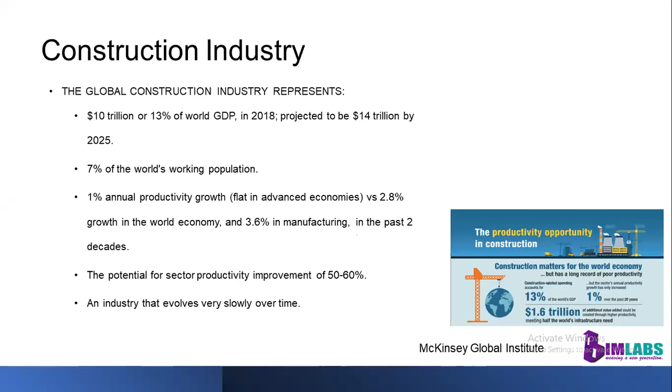So as a whole, when comparing all the construction works, we can classify the construction industry into three categories: the first is building construction, the second is infrastructure engineering, and the third is industrial construction.

Under building construction, the most common kind, and most familiar to you, is residential construction. The second is non-residential construction. Residential construction involves all the houses or buildings meant for residential purposes. Non-residential buildings will not have a residential purpose, and they will be procured by private organizations, or sometimes by government organizations.

Next is infrastructure, meaning heavy civil engineering works, for example large public works, dams, bridges, highways, railways, water systems, wastewater systems, and utility distribution. When it comes to industrial construction, mainly offshore construction, examples include power generation plants, mills, manufacturing plants, mining and quarrying, etc.

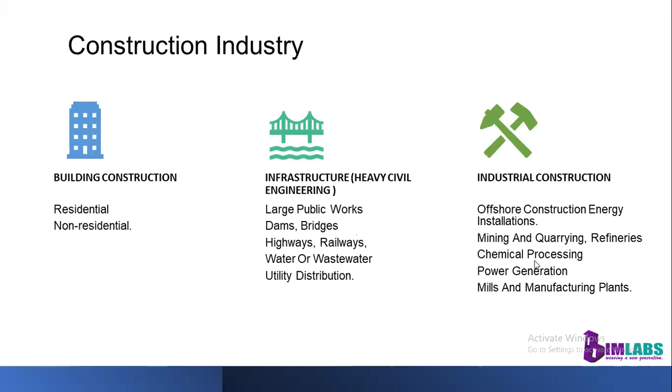Let's look deep into residential construction. When I'm talking about this, you can imagine a house being built nearby you. Consider that you are going to construct a house for yourself. For your construction there will be different processes involved, and it will be undertaken by the landowner. If you are going to construct a house, you will be the landowner, the individual undertaking that project.

In some cases the individual can create a plan for their building depending on the size of the house. If it's a small building, you can plan it yourself, or we can consult different house builders near you, any best property developers, or general contractors, etc. We can also go for providers of public or social housing.

When you think about residential construction, do you think that in the US, residential buildings are constructed using timber or wood? And in India, we construct residential buildings using brick or concrete block, isn't it? So why is this variation in material happening between these two countries? Have you thought about that?

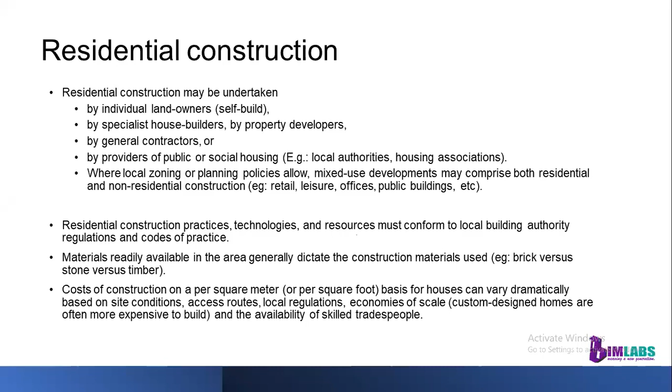Next is non-residential construction. Depending upon the type of building, non-residential construction can be procured by a wide range of private or public organizations, including local authorities, educational or religious bodies, transport undertakings, retailers, property developers, etc. Such construction is complex compared to normal residential building, and this requires a general contractor, under whom there will be subcontractors managed by the general contractor.

I would like to share a video with you which will describe residential construction and non-residential construction.

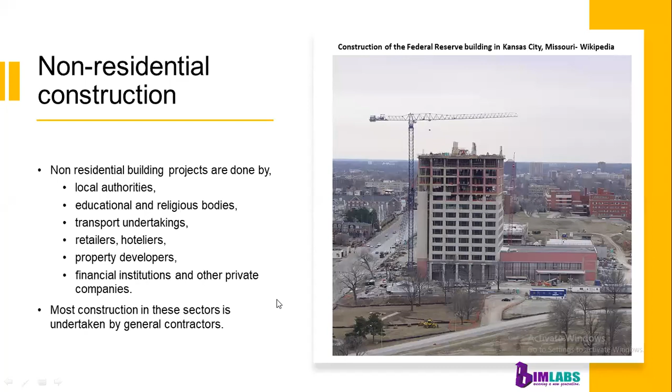Next is infrastructure construction, meaning the construction of roads, bridges, canals, dams, tunnels, airports, and so on. This kind of infrastructure construction takes a lot of time, sometimes years to complete, and it differs from residential and non-residential construction. Compared to those, it becomes more complex.

When finding contractors for this job, we should find expertise in this kind of work. For example, if you are going to construct a dam, you should call a contractor who is expert in the field of constructing dams, not in the field of constructing tunnels. This is very important, and safety measures should also be taken while constructing infrastructure works.

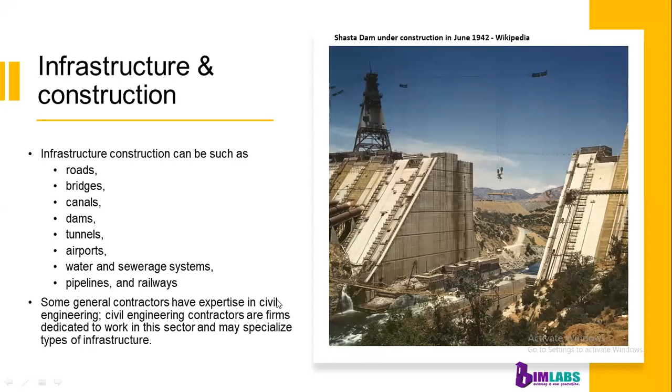Next is industrial construction. As the name suggests, industrial construction is the kind of construction done for industrial purposes, mostly offshore construction like wind power construction, plant construction, mining, quarrying, refineries, and so on.

Do you think that the construction process, from the starting planning to the end of the project, is similar for mining compared to the construction process of a warehouse? Do you think so?

Okay, if you think so, I'm asking a question for you. Hello? Do you think that the process of construction in the refinery, like in the... excuse me, Shibin, are you asking anything?

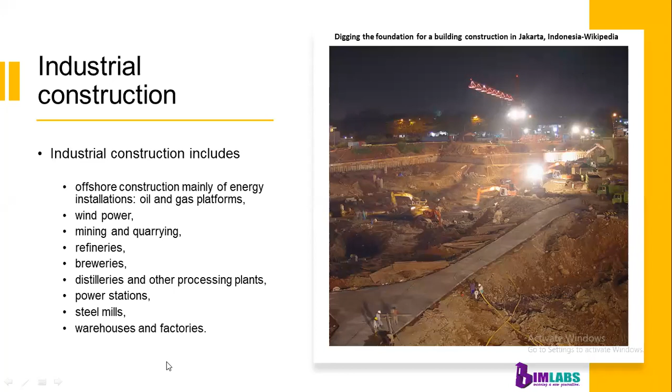Then what are the construction processes there? There are different processes for completing the construction, like planning, then financing, design and documentation, construction, and so on.

In the planning stage, for explaining these steps, I would like to tell you about a very familiar and popular project. You may have heard about the Lulu Mall. Lulu Mall is now constructing in Trivandrum, it is in the construction stage. So I'm going to take it as an example.

In the planning stage, the Lulu group thought about what they are going to build. They decided they will create a shopping mall. Then, where are they going to build it? In the first time, they actually tried to build it in another place. Now they are constructing it in a place called Akkulam in Trivandrum.

In the initial stage, the place was not there, it was actually near Pattom, another place in Trivandrum. But then they rethought for another place, and got more area in Akkulam. So they changed the idea for building it in Akkulam. These things are included in the planning stage.

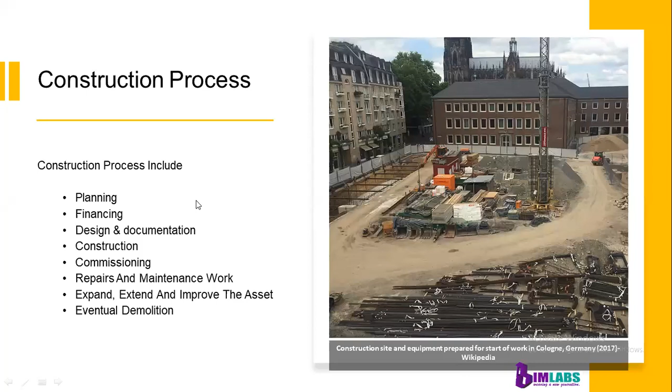Next is eventual demolition. Like in Kerala, in Ernakulam, you may have heard about the Maradu flat demolition. So if needed, the demolition part also comes under the construction process.

If it's a small project, the owner itself can act as the designer, paymaster, and also the labor for the entire project.

If the project becomes complex, and needs any kind of custom design house or custom design projects, then it will need multidisciplinary expertise - meaning different disciplines like engineering, architecture, mechanical, electrical, etc. For a complex building, we need the role of all these disciplines and the manpower from each.

For example, designer, contractor, construction manager - there are other professionals too, like quality manager, etc. And they all have different roles of their own.

For delivering such projects, while starting in the initial period, we can decide which project delivery method we are choosing. There are a lot of project delivery methods. In India, we commonly see two project delivery methods used - design-bid-build method and design-build method.

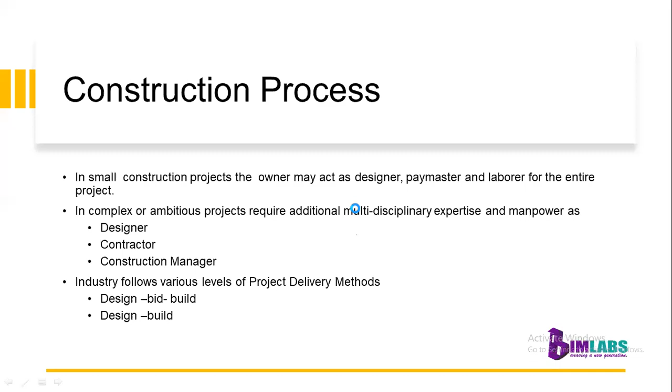In a construction project, there are unskilled persons, semi-skilled workers or laborers, skilled trade persons, and professionals, including technical professionals and managerial professionals. Skilled trade persons include carpenters, electricians, plumbers, and so on. Professionals include architects, civil engineers, building service engineers, project managers, etc.

Now, the AECO industry. Have you heard about this AECO industry? What does AECO stand for? If you have heard about it, can you give me the answer for what AECO stands for? Please put that in the chat, I will give you one minute. Can you guess the full form of AECO industry?

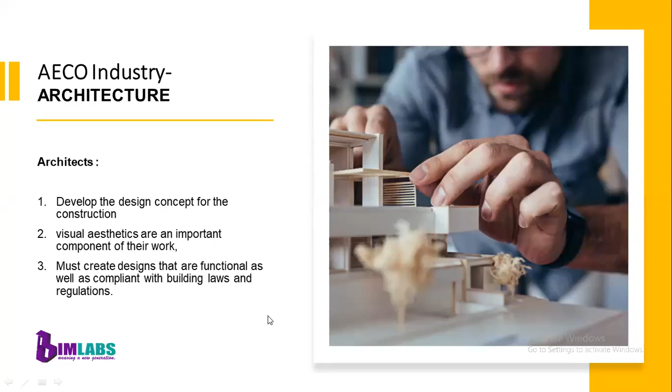Obviously no. So we should also look into the functionality of the building. If you want to meet the functionality of the building, we should follow some rules and regulations. We should meet all these rules and regulations for making our building functionally capable. So that thing is also in the hands of architects - they have a role in taking care of these kinds of rules and regulations. And up to the end of the project, they have a role of inspecting whether this is happening in all the construction processes, in other stages also, and analyzing, etc.

So in the AECO industry, the first letter is meant for architecture. The architect has a very complex role in the construction process from its inception to the end, so their responsibilities are like this.

They have to understand all the requirements of their client. They have to get the idea from the client, and with the idea they can create the drawing for the client. Also they can create a model for pleasing the client. Then they can also work in quantifying and qualifying the project in terms of budget, site characteristics, and regulations. And then they can develop a sequence of operations. After that, they can keep records for daily progress. Then they can manage the bidding process when a contract is bid on a job.

Then they can clarify the details for the engineer or construction team, since they are creating the conceptual drawing - they have the idea of the plan. So when it comes to the engineering and construction team's process, they may have different doubts in the plan. If there is any problem in the drawing plan, or if there is any risk that can happen by following this plan, these kinds of problems they will tell to the architect. So at this time also, the architects have roles in clearing their doubts, and they also have to certify whether the project is completing in the prescribed manner from the starting to the end of the project. So these are the roles and responsibilities of the architects.

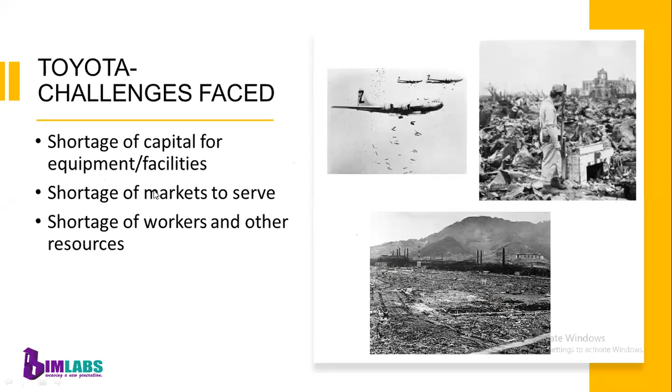The problem they faced was the scenario in Japan after World War Two. There were not many resources left in the country, and no one to provide investment for starting an automobile manufacturing company. Even the markets were very limited, as people couldn't afford to pay a large amount for cars. These were the criteria they had in mind while starting Toyota Motor Company.

It was an idea of Taiichi Ohno which revolutionized the management principles. He found the principle of the Toyota Production System, which is the base for lean manufacturing, or simply the lean principle. Here, what they did was remove all processes which don't add value to the final product, and tried to minimize waste as much as possible.

To do that, they didn't produce several cars a year; they only produced as per requirement. It's also called just-in-time production. Their major concern was to reduce waste and avoid non-value-added services.

This is actually the concept of lean construction also. Here too, we focus on reducing waste. You might be familiar that after completion of construction, there can be several wastage of materials. Even some persons might be working on a particular thing that ultimately doesn't make sense, so that working hour of that person is also considered waste.

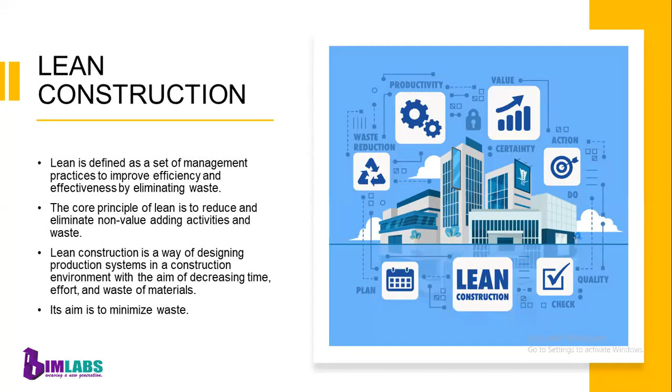Many of you might be new to this concept, but you have to be aware of it because it's currently an emerging technology, and for current graduates it's essential that you know these concepts.

If we compare lean construction with traditional systems, many of the disadvantages could be avoided when we use lean construction. Some statistics related to current projects are provided here. Without going into detail, there are many issues where the final building will not be what the client had in mind, or the time and cost will be more than expected. These could be avoided if you make use of lean construction.

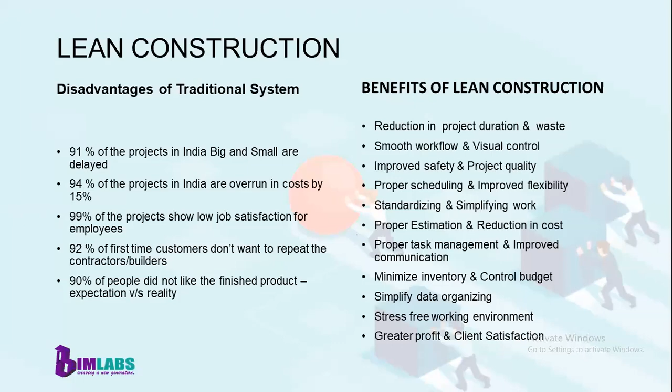In order to make lean construction possible, certain principles are there. Even Toyota's primary concern was the customer or the markets they serve. They only asked for requirements from the customer, then created the product, making sure it meets the customer's requirements. In lean construction too, the basic principle should start from the customer's point of view. It's important to identify that, so we can provide our client with the required models.

The second thing is the elimination of waste, then we need to define the value stream. Among the different construction processes you've heard about, you have to define the value stream. This means that by doing that analysis, you identify which processes are actually contributing value to your final project or building.

By identifying that, we can also create a work process flow, and we will use pull planning and scheduling, which we'll discuss later. And the last thing is to strive for continuous improvement.

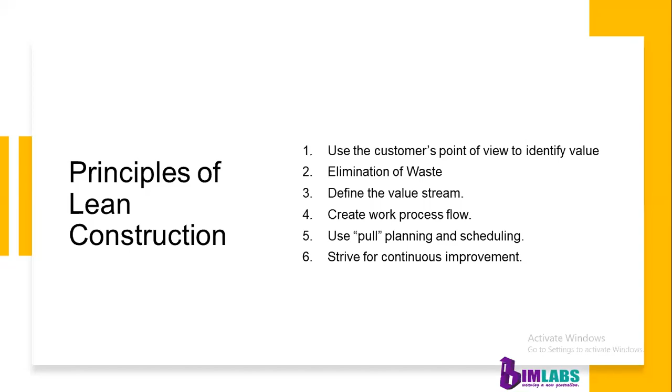In order to achieve lean construction, we will be making use of some tools such as pull planning or last planner system, then IPD which is integrated project delivery, then building information modeling, 5S, and Kaizen events. We'll discuss pull planning, IPD, 5S, and Kaizen in today's session. Building information modeling, since it's a vast area, will be covered in the coming sessions.

So about pull planning. It's actually a concept of management based on the downstream work. Let's consider an example of a construction project. In the normal process, you will plan initially - a project engineer or particular person will create the plan, with no involvement of any other persons than the project management team. They will give the schedule of that work. So this will have some troubles when you directly go to the construction process with that particular plan.

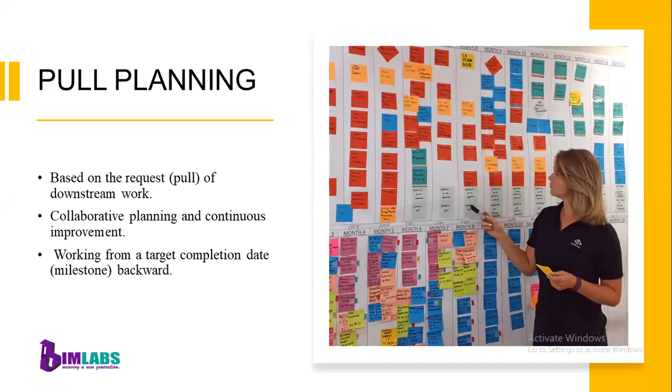If you use pull planning instead, there will be involvement of even the downstream workers. He or she can contribute or suggest that this particular activity can be completed first in order to start the next activity. So they can give suggestions, and based on that, they will create certain plans. For creating that, first they set a milestone of at what duration or date the particular project has to be completed, and the last process which has to be completed will be mentioned, and then they will work backward. That's what happens in pull planning.

The next thing is IPD, or integrated project delivery. This is similar to pull planning. Here what happens is they will integrate between the different stakeholders of the project. Stakeholder means whoever is actually affected by the decisions being made on that project - for example, the client or owner of the project, the designer, the contractor. By involving all those persons in decision making, we can actually create a big difference, and we will be able to create a project having maximum efficiency. That's why integrated project delivery is a better form of managing our project.

Next is 5S. This is another concept we have adopted from the Japanese world. The 5S is a representation of five Japanese words: seiri, seiton, seiso, seiketsu, and shitsuke. This 5S is not just complicated - I'll try to explain it as simply as possible.

For that, just consider your study room. Let me ask you a question: how many of you have your rooms in a proper, organized manner? Most of you might not have that much organization in your room.

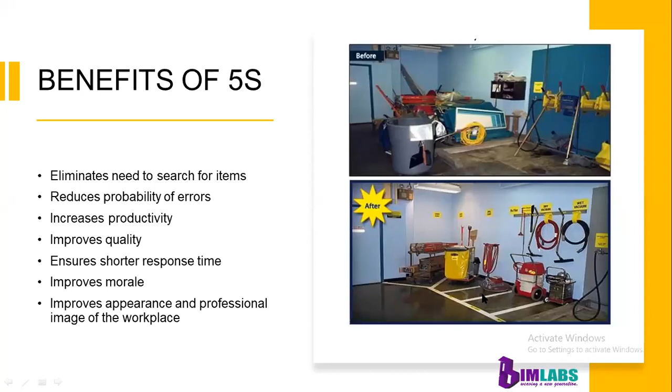And the next ideology is Kaizen. Kaizen is also a term from Japanese, which means change and good, which combined we can tell as improvement. It became famous after Masaaki Imai's book was published.

Here, let me ask you a question. In your opinion, which will cost more? Will continuous improvement cost more or will innovation cost more? Which will be costing more money? You can put your answers in the chat box. I will give you 30 seconds.

Exactly, innovation. In innovation, there is a requirement for investing money. But in continuous improvement, or Kaizen, it's not like that. You will be continuously improving in small steps. It's a small step continual improvement. You won't be getting drastic change after a day, but at the end of a certain period of time, you will reach the position you were looking for. In innovation, if it fails, even the investment would be in vain. So in continuous improvement, it's not like that.

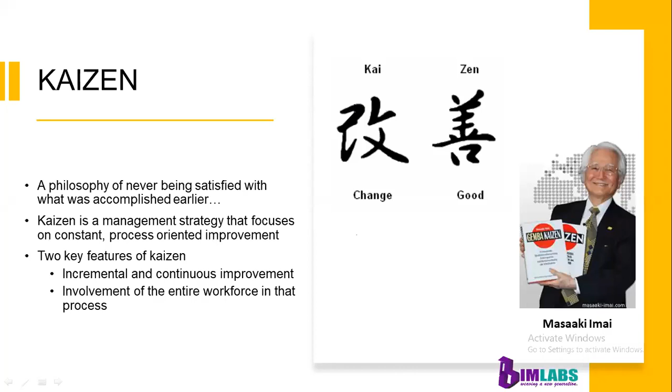So what happens is the company will identify the waste within there. Waste means the unnecessary or non-value added things present in your system, and they will try to eliminate those things and plan the countermeasures. After that, we have to do a reality check on whether the planned change could be done properly. If it could be done, he will change the software, making some updates.

And if the trial runs were successful, that will be measured for results. After verifying the change, we should measure the results, and if it is okay, it could be made a standard, so it could be done this particular way, and the proper updated version of the software could be released. If you make some success, you can celebrate it, but it should not stop there. You have to do this again. So this is actually a cycle.